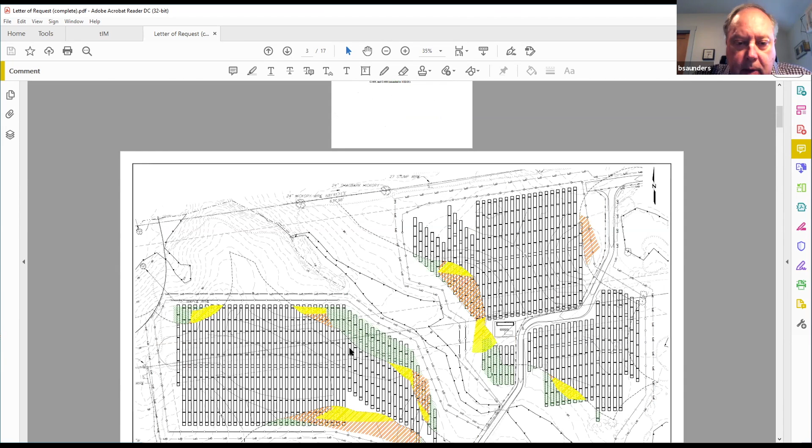And in the original plan, under the existing order of conditions, there was no situation where we had only panels—we had panels in the areas where we were doing grading. So the table I included in the cover letter shows that we have no solar panels only under the original plan. But there were, in fact, solar panels—they were just in the areas where we were also doing some grading. We didn't want to double dip on the numbers there.

Couple other things with the change in the solar panel system from fixed to tracking: we'll be able to increase the power output from this facility to 5 megawatts from 4. So again, it's the greater efficiency in a tracking system versus a fixed system.

I've already mentioned that we're staying the 25 feet back. There's no change in the driveway crossings. The equipment pads are located outside of the 100-foot zone as they were before. So the changes are grading and panels within the 100-foot buffer. And I'm happy to answer any questions to the best of my ability.

One thing I just wanted to add that we had talked about, Brad, was also that in the project narrative of the original order of conditions, it references a 50-foot setback, but you were able to provide information from a letter with DEP that remarked upon how it was supposed to be a 25-foot setback. And then I was able to find the minutes reflected that in the discussion as well. I don't know if you can still include that in this request—yeah, just another thing, I would like to include that in the request. There are a couple of inaccuracies in the existing order of conditions.

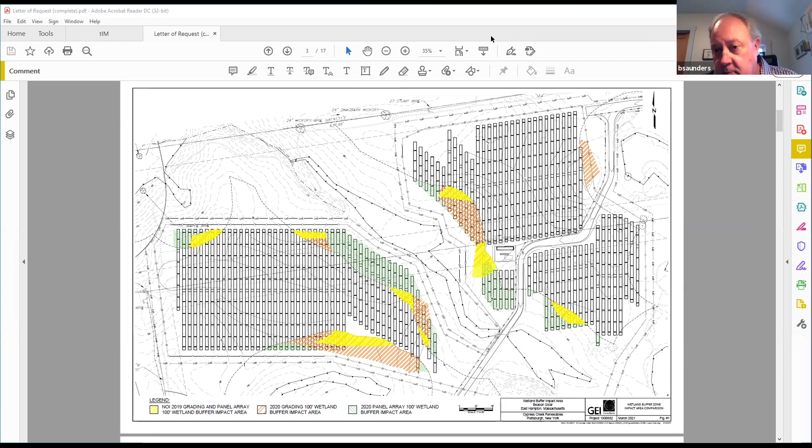Well, I haven't broken it down that way. What I did is looked at the change. So for instance, there's driveway within the buffer, and that hasn't changed - the same numbers that were provided in 2019 remain. There's work like the panels themselves, which there is a change, and that's why I provided that information. There's a change in grading.

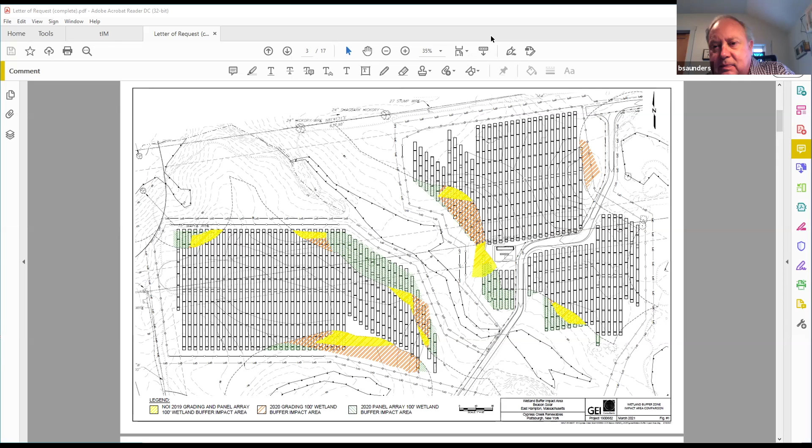And so I guess it's a question of adding them up in total, but the change should be essentially what I'm showing in this cover letter. So the overall change in disturbance - again, we did it back in 2019. We did the disturbance by particular, the numbers per different type of disturbance. So it's not like there's a simple overall number.

But the increase - there's 28.8 acres of 100-foot buffer zone on the site. The increase in work in buffer zone alone is roughly 26,770 square feet.

I think you said there was about 15 in the original order and 41,770 in this redesign. No, no, I misunderstand - yeah, I understand the confusion. There's a difference in grading. So if we break down an activity to grading versus solar panels, because we're doing a number of solar panels, but there's no grading required - it can be placed at the existing grades out there. So the change in grading within the 100-foot zone would be 41,770 minus 14,837. So about 26,000? Right, but that's just grading.

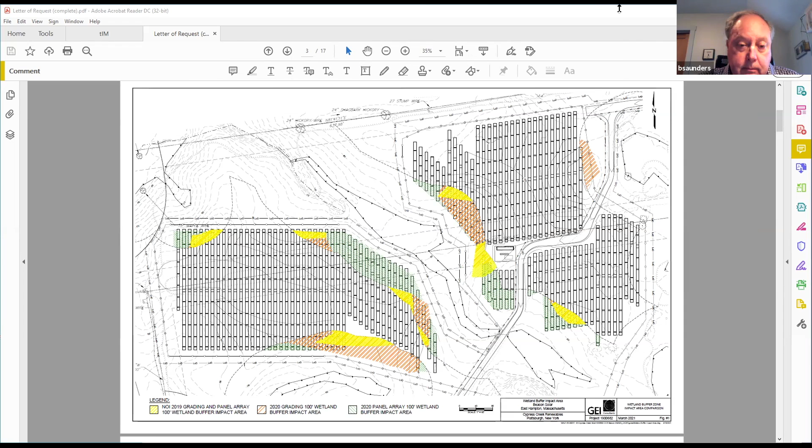My sense is that these are more than minor changes. Yeah, policy 85-4 really says it's for correcting errors like wrong file numbers or typographical errors, things like that, not really for changing the scope of the project. So I agree - the way this is phrased, relatively minor and unchanged or less impact on the interests of the act - I don't think I can look at something that's increasing its impacts, just grading alone by more than half an acre in buffer zone, and think that that's less impact.

So, short of that, are there other members of the commission who wish to speak? I don't want to shortchange anyone. Cassie, has Michael Whittemore joined the commission meeting yet? Actually, he's just joining right now. Fantastic.

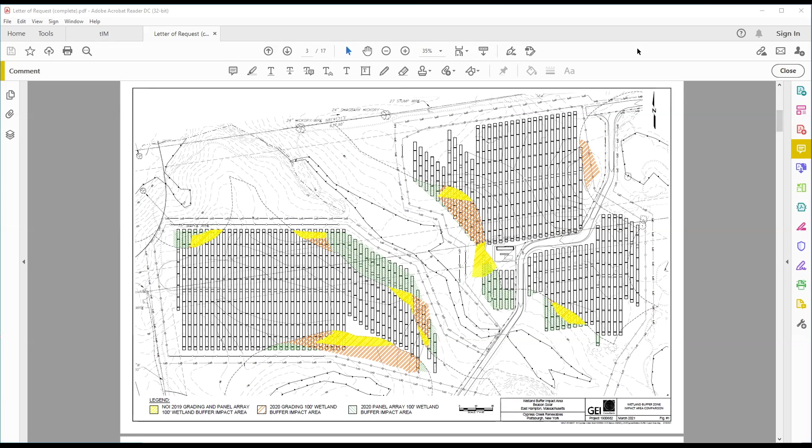Okay, well, thank you - I think you've gotten the kind of collective opinion relative to that matter. We appreciate your time and the graphic display of these changes - that's actually very helpful, thank you. Okay, thank you very much. Thank you, good evening, bye.

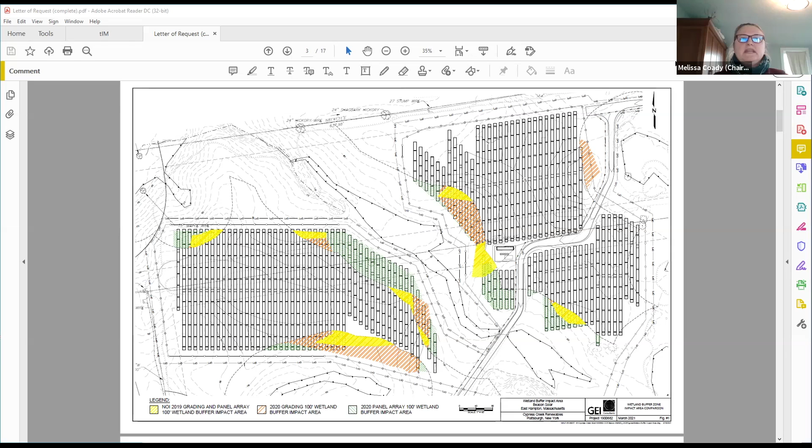All right, resuming agenda order. We have no public hearings or meetings and no requests for certificates of compliance. Deborah, I'm assuming you're back in the mix?

Yes, thank you. Okay, enforcement actions. Cassie, any updates to highlight?

Yeah, I did have one. I reached out to Mr. Judd at 11 Button Road, because that was something we wanted to do as springtime came around, which it seems to be finally here. So I reached out to him, and he actually said he was just about to reach out to me.

Because he had spent last week - I can read you his message. Last week, I spent some time filling in the holes with the dirt piled next to them and restoring the area to the previous grading. I then spread mulch that was from chopped up branches over the area. I took another picture yesterday to show some vegetation is already starting to grow in the area. I'm not working back in my office, but you're welcome to go visit the area to confirm.

The real steep part of the hill, I couldn't put any mulch on, but I figured that is basically the way it was before, if you look at the other side of the creek. He has higher resolution pictures available, and he talks about difficulty including the images. Those images are also provided in that update document I sent everybody.

My plan was to do a site visit as soon as I could to see the state of things out there. I think where the conversation left off last time was that the commission wasn't sure what the state of the plants were in that area beforehand, if there was significant vegetation or not. So we weren't sure what kind of replanting to require, if any. I don't know if it's too early in the season to make that determination, but I'd be willing to go out there and look.

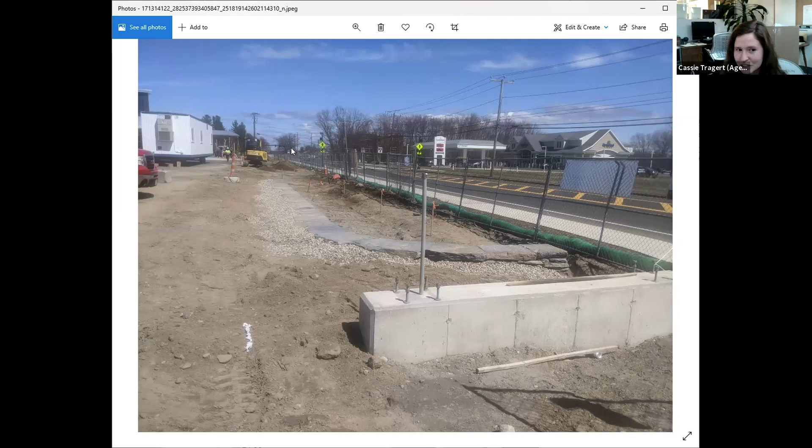And there's the wetland areas over there. You kind of see the trees. Yeah, I mean, that's on the completely opposite side of the road.

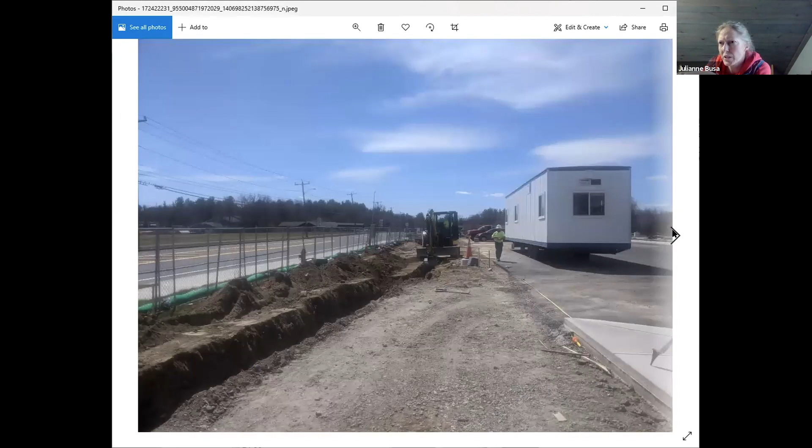So unless - the only question, which I can't tell from the pictures, is there potential for the soil to get rinsed across the sidewalk and into a catch basin on the close side of the road that then would dump over there?

Yeah, that's a good question. I'd have to look. I can go out again and look for that, because honestly I didn't check to see if there's any associated with the road catch basins. So I can check for that.

When that trench gets filled back in, it might be pretty level and stable, so. Yeah, that's kind of what they were thinking, that it might take care of it. Yeah, like I said, this will be filled, and then they'll do seeding, and then they would remove the wattle. It's a closer picture.

Oh, it's not a good one. No. Yep, trench. Oh, I guess that's it. So yeah, I guess this area is kind of where it's ending.

That's where, over here, like across the street, is where the resource area is, and then it kind of extends over here. So it's kind of a downslope from that area to this area.

So Cassie, what day did you say you took these photos? These are on the 7th of April.

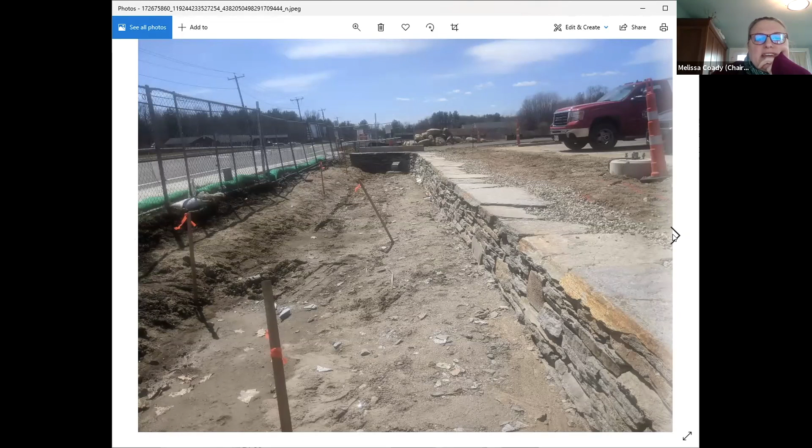Okay, and how long did it, I'm just trying to see when it last rained relative to that date, because that one unfinished stormwater basin - this is part of it. This is the other, that inlet was over here.

Get back to that picture. So you said this was the 7th or the 4th? The 7th. Here's the entirety of that basin.

I'm just a little concerned that it has so much standing water in it, because this isn't an official site by any stretch of the imagination. I could go to something slightly more official, but it was almost a full week ahead before that we had may have had any recorded precipitation.

So none on the 6th, none on the 5th, none on the 4th, trace on the 3rd, less than 1/10 of an inch on the 2nd, and about 2/10 of an inch on the 1st.

So I'm just in general being sensitive to stormwater systems being constructed as designed so that they can function as designed. I'm curious as to why that has - if you could check and see if that is supposed to, or get clarification on the status of this basin, and if it was supposed to infiltrate, because that seems like that shouldn't be holding water after almost a week.

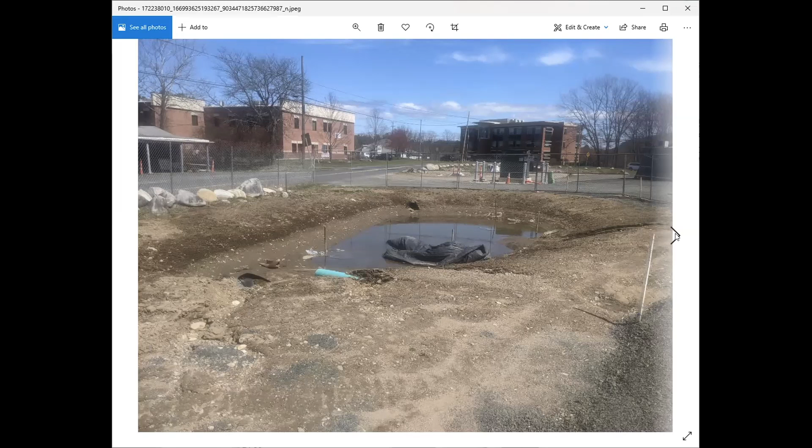All right. I mean, yeah, as long as it's pretty flat, and it seems like the grass will grow in quickly before any of that soil would move someplace. Right, it seems to be all right.

Cassie, I'm assuming they're going to hydroseed. Can you verify? I can verify that. Okay.

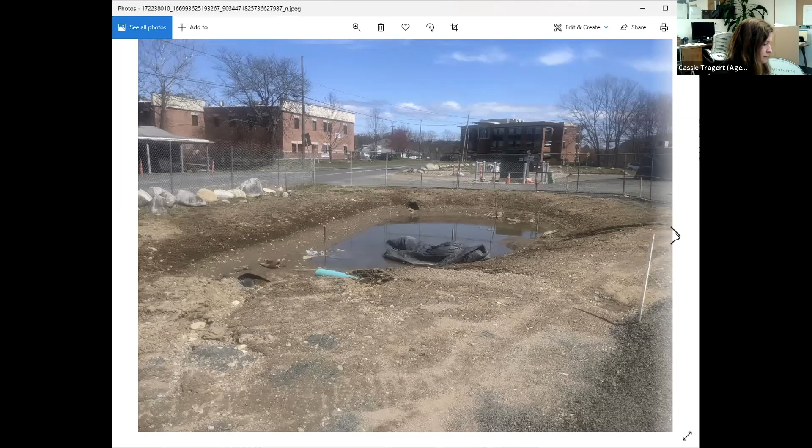I noticed a line of boulders in a field to the south the other day. I guess I'm thinking those are monuments delineating the wetland boundary that we asked for, but it's been a while so I didn't quite remember.

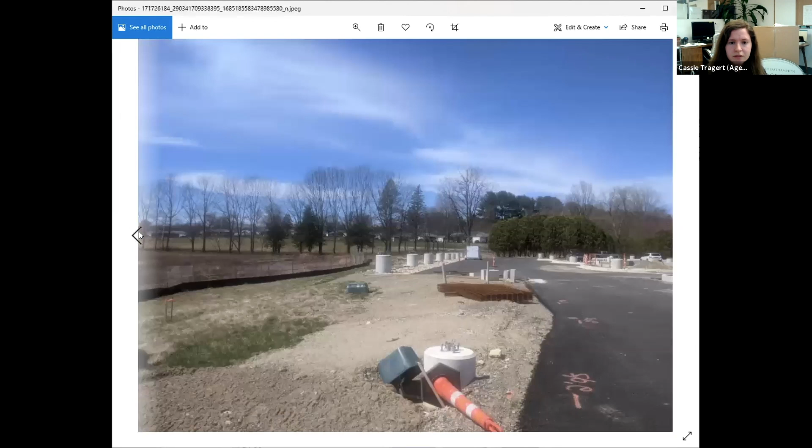I'm pretty sure that was a condition, but what they've also done, you can see it in one of these pictures. They put up these markers that say wetland boundary. So I don't know if that's the area you're talking about where you're seeing the boulders. Yes, okay, so they might have done that in addition.

I saw them the other day as well, and that's what it looks like. They're all out along, or parallel to, Route 10 along that border of the wetland.

I can go through just generally to give you guys an update from the site visit on everything else. So, this is the area we've already covered, you've seen the pictures of this basin. The basin that is holding water is behind me right now. There it is in detail, just this very blurry picture of this box.

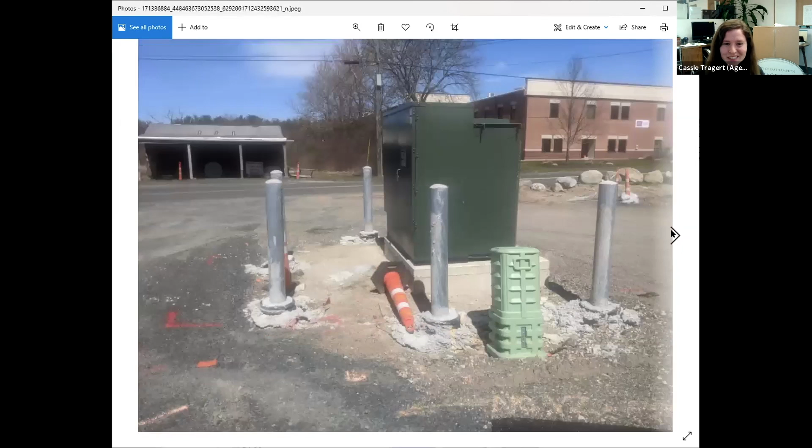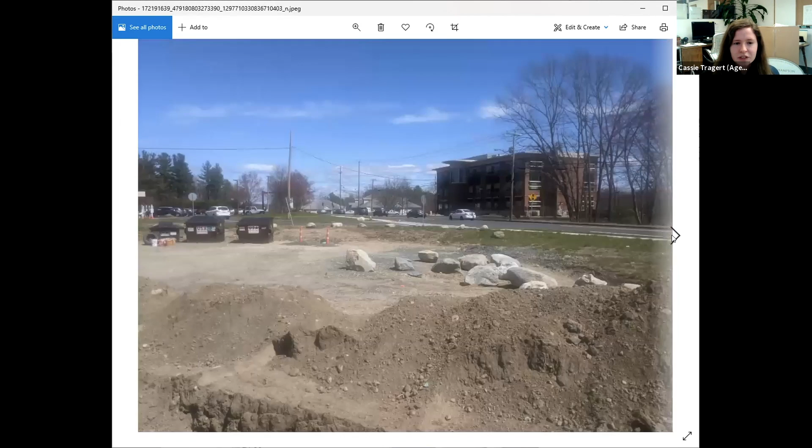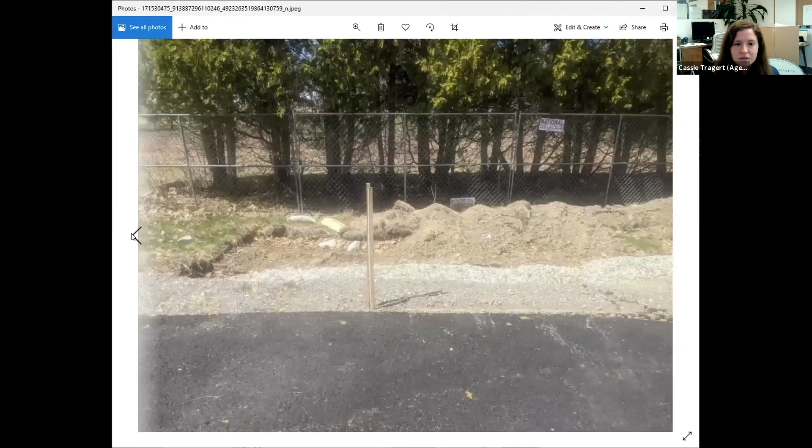So jumbled, sorry. Yeah, there we go. So this is all along it. That basin that was holding water is over here, and Route 10 is way over on the other side of the property.

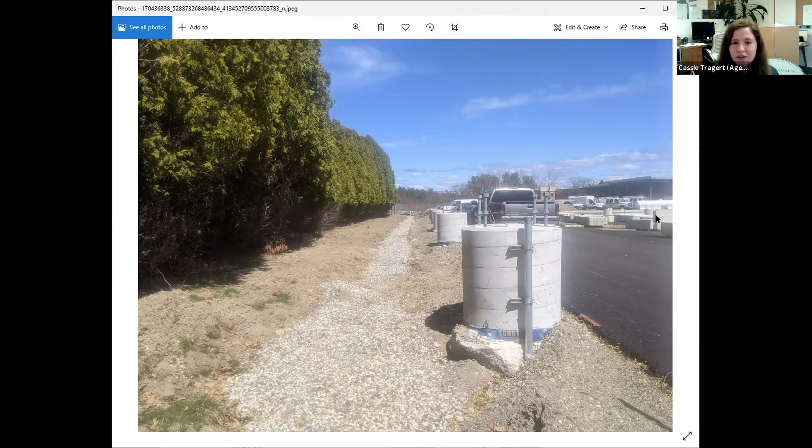That all looked good, it made sense. This is the rear, so the wetlands to the south are just to the left here. These outlets, the drainage along the top, this is the existing outlet that was there. Erosion controls, everything's looking good.

This is a stockpile of rocks, some nice looking rocks there. Wonder where they're getting those from. They probably dug them up, maybe. If it sounds like they're looking to get rid of them, let me know. Okay, I will. They didn't say that though.

This is a marker that's in between where the wetland is and the parking lot. The parking lot is over, I think, either to my left in this. They're going to put up these purple martin boxes in those locations, I should have a picture of it. It's like over here-ish is where they had marked that ground.

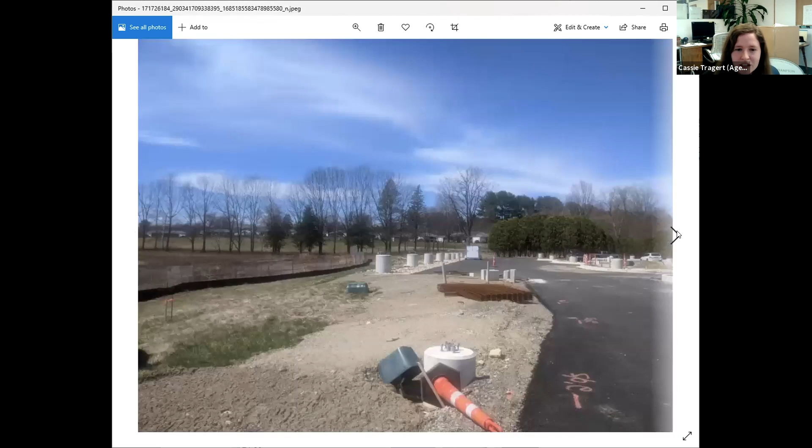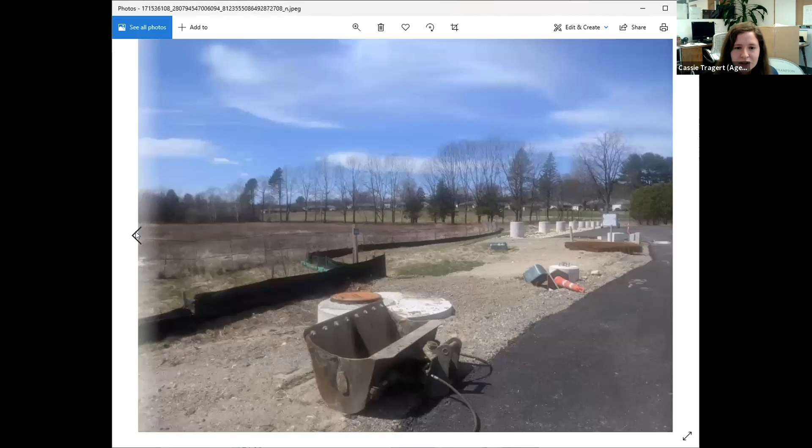This is a nightmare, sorry, I don't know why it's so out of order when I took them. These logs, that's what they're going to be mounted on, is these logs.

Okay, but overall, more of this area, that existing basin, also holding water. Again, unless they were discharging dewatering effluent through the system, I don't understand why there's so much standing water on site.

It doesn't seem to be - I mean, Dan Buttrick, correct me if I'm mistaken, but I thought infiltration was supposed to occur within 48 hours. Am I making stuff up?

That's about right, but during the construction period things may not quite be operating properly. So there's that fine layer of silt in that basin we were looking at earlier, which will probably be scraped out when they convert it from a construction phase to a post-construction stormwater measure. But who knows, I can't explain why there'd be so much water in this level spreader thing.

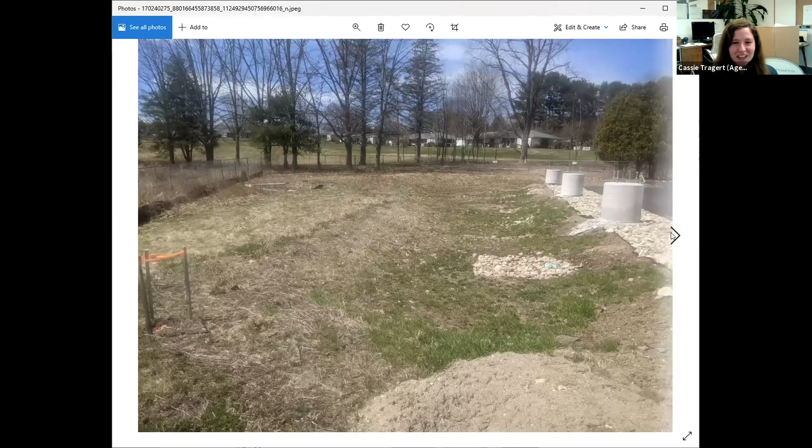It's a perfect preamble for our next item. I don't know if anybody has any other questions about this site at this time. I can go on to the next one. Okay, please.

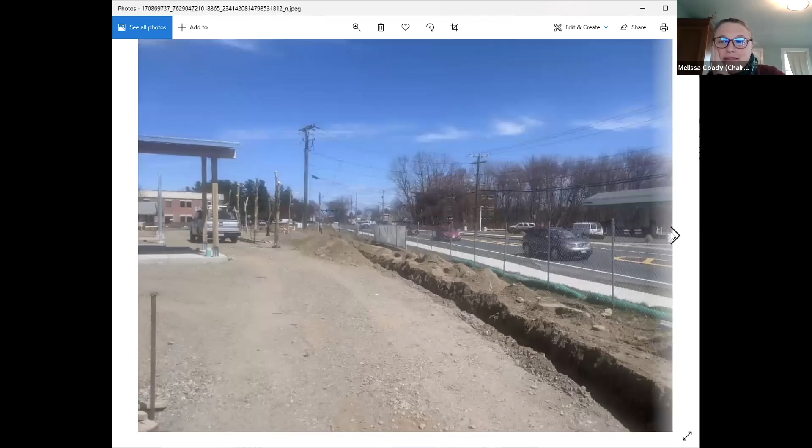Item M. Cassie, Easthampton School Committee, number 151305.

So two things for this one. Again, I did a general site visit just because it's springtime and checked everything. But also the city received a complaint from a resident about some of the stormwater structures. They put in some silt fencing around them to try to keep them from getting overrun with the loose construction sediment, and that had been failing in some places. By the time we did the site visit, they had fixed that and cleared that area as best their ability and reestablished that silt fencing. So I'm going to check that as well.

This is going to have a million pictures, but hopefully I can do this in a reasonable way. So let's see. This site visit was conducted on the 8th of April.

And the other thing that I found, and Jay also was able to attend, which was great, was that one of the stormwater structures in the rear of the building has been retaining water for some time and not draining. They said it didn't drain, wasn't empty like all summer.

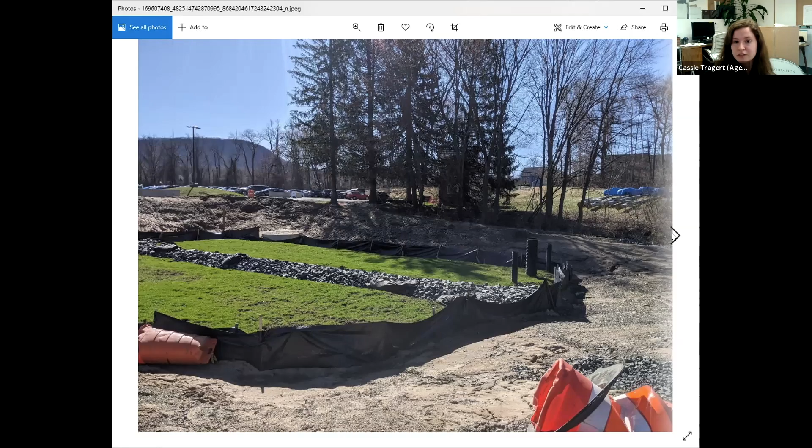Sorry, so I know you were not with the commission when it reviewed this project. Would it be possible for you to look at the file, like the stormwater report, particularly the on-site soils evaluation, and see what they logged for that general vicinity? Because if what the contractor is running into is significantly different from what was documented and designed around, that's a problem.

Especially on a site historically or anecdotally known for its water issues. Right, yeah, I think the way it was described to me, the site has the best of both worlds - it's very sandy in some spots and very clayey in others. That's how it's been described.

So that was the main thing that stood out to me from this visit. Otherwise, everything looked good in terms of erosion controls. They had fixed - this was the area where that problem had occurred, and you can see the old silt fencing. I guess they just left it, and they put new silt fencing in, and cleaned out the sediment that had made it in there.

They left this area. They've seeded other areas, and you'll see that in some of the other pictures. That's what's underneath this black top, I think, or they're getting to that stage, but they left this because they're going to do another connection that isn't done yet.

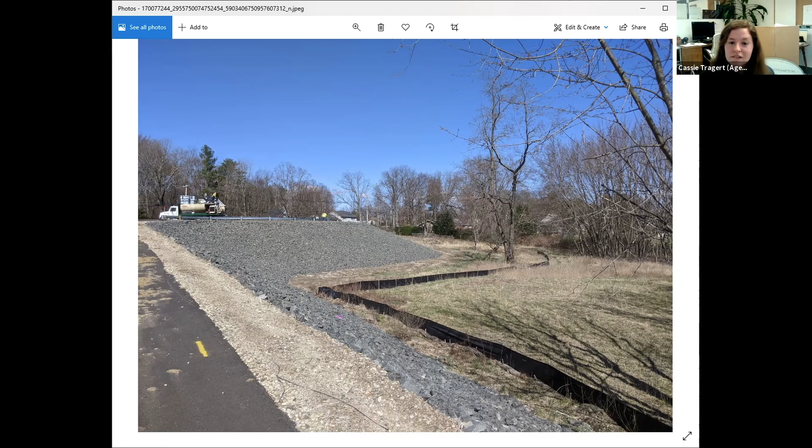Okay, I'll let you know about that one at the next meeting. This is the one that had the breach that a resident made a complaint about again.

So this is to the north of the property. The basin that's holding water at the rear is up ahead and to the right slightly. But basically there's wetlands all along this edge here.

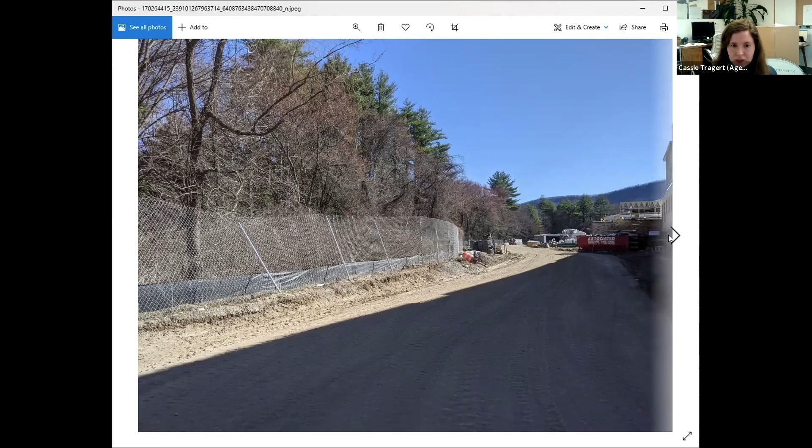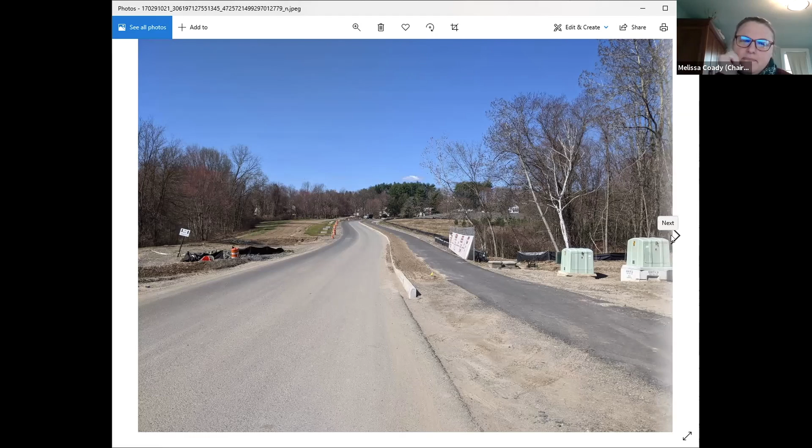Now we're back at the front of the school again, looking up towards everything. There's another basin over here, and then there's that outlet towards the brook down here. Did you get a look down at the stream? I did, yep. And how is it looking?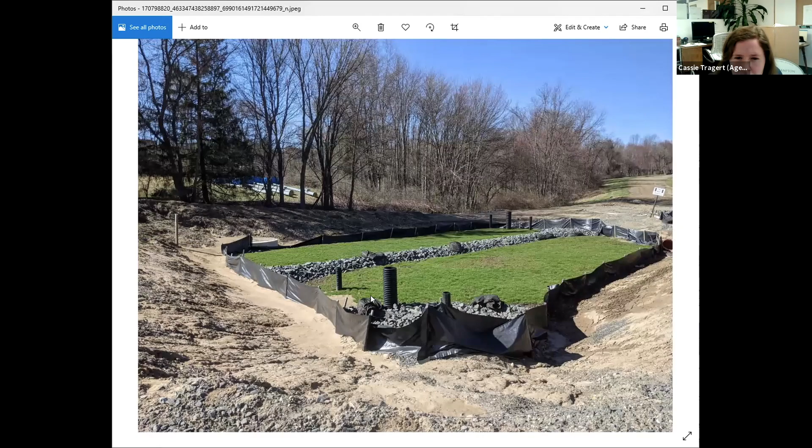Zoom ahead. That was not it. Okay, this is the, nope, not that one. That's across from the stream. Okay, so this is above. There's the riprap and there's an outlet here, and then that's the stream down below.

Do you have a shot from the stream looking up or from the other side of the stream? Let's see here. Oh, nope, this is a little bit farther back from that other image that showed the riprap. Can you go back another one or two? That one. Yep, so yeah.

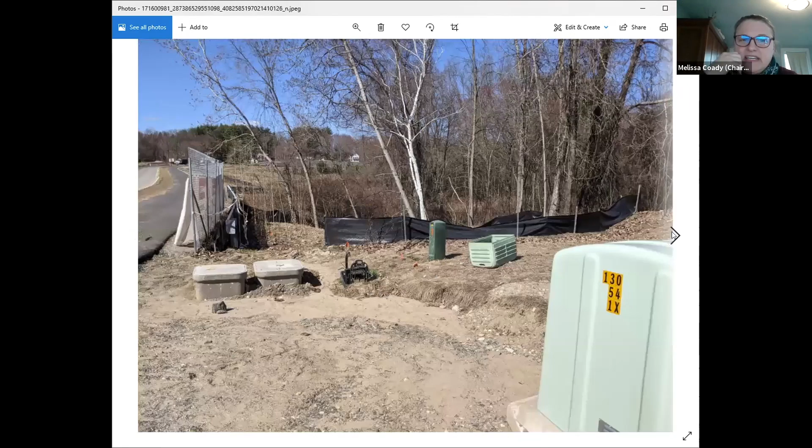That failed. Is that in a stormwater basin? Yeah, but they still have sediment getting to the other side of the silt fence. How is that happening, is it going under it? I guess that'd be my guess. So they need to clean that out, or it's a spot that needs to be cleaned out before it vegetates. Yeah, it looks like it went under it. I'm guessing that's not the type of soil they're supposed to have in there, even if it vegetates.

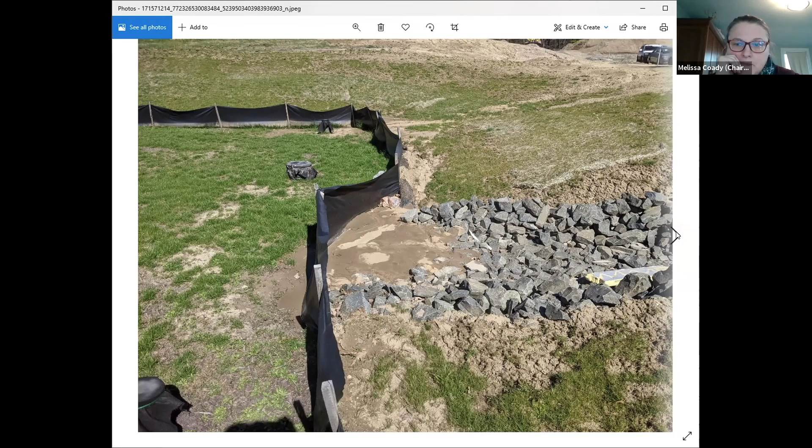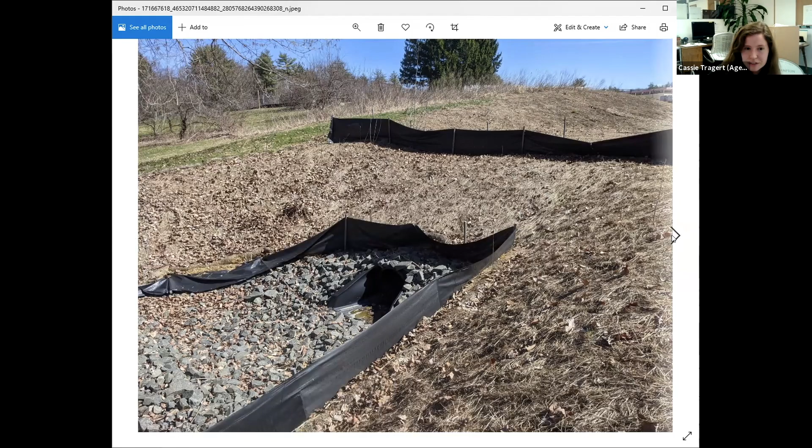Okay, let's see. Yes, this is looking up from the stream, and I think hopefully I have a better picture, more from the inside of the stream.

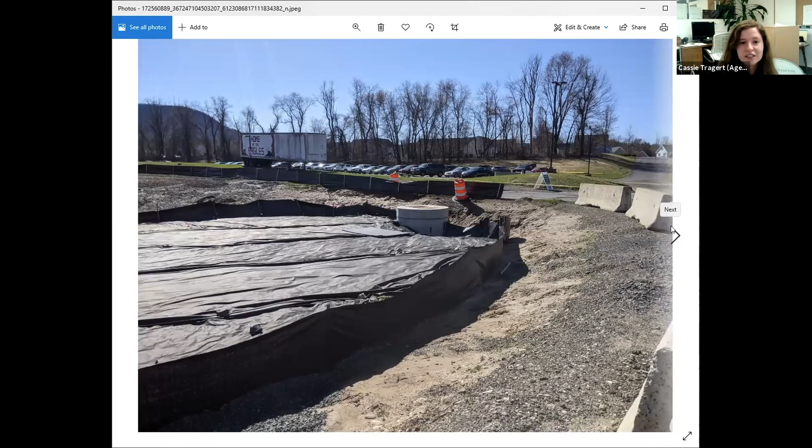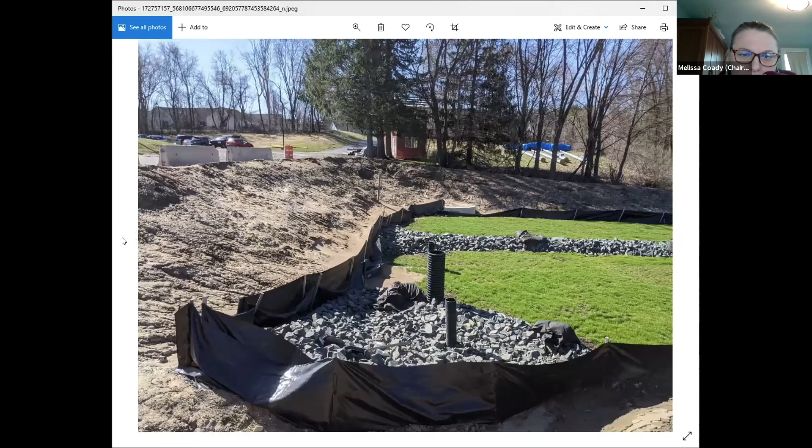Well, I didn't see any sediment accumulation on the riprap below the outlet, so that's encouraging. Yep, and I can say confidently here's another, although there's trash. But I didn't find any sediment like... go back to this one? One more. Yeah, at the tail end of the riprap, it did look like there was.

I might have, let me see if I have one more picture. Then hopefully it will be good. Oh, I guess not, that's the end of it.

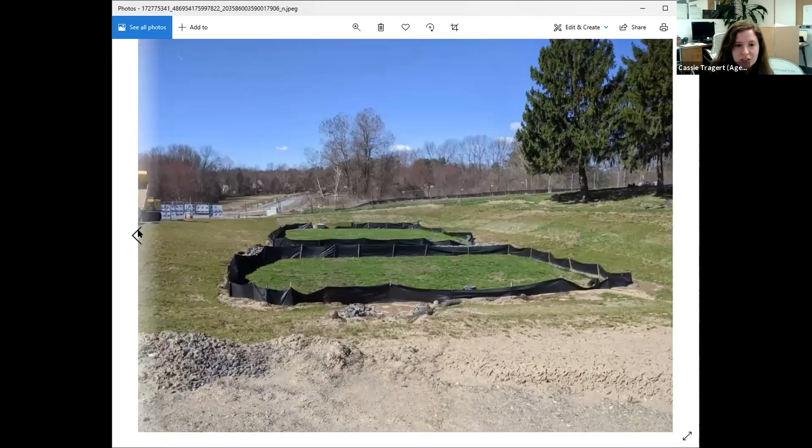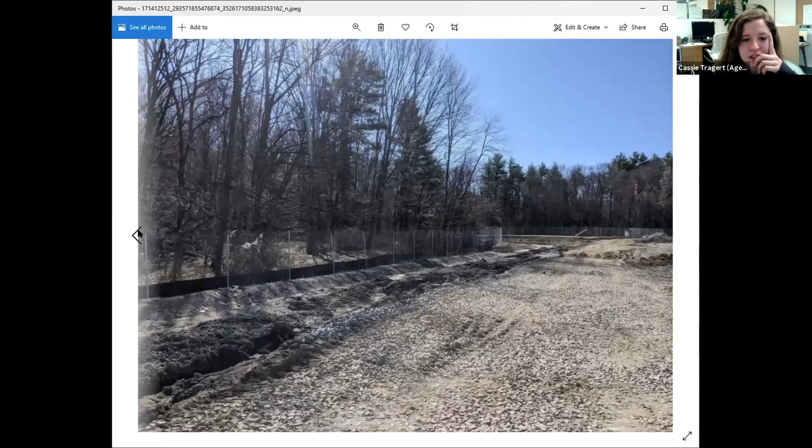Okay, so there are definitely some areas of sedimentation that need to be addressed. That needs to get cleaned up before it gets washed into the stream. Yeah, definitely. And then things with the sediment in the stormwater structures, they're supposed to clean those out before the project's complete. And if they need to clean them out more frequently because it's washing sediment into the rest of the system, then that's what they have to do. Right.

So they still have a silt fence down at the bottom as well. I don't see any signs of erosion from the adjacent uplands here. It's the end of that.

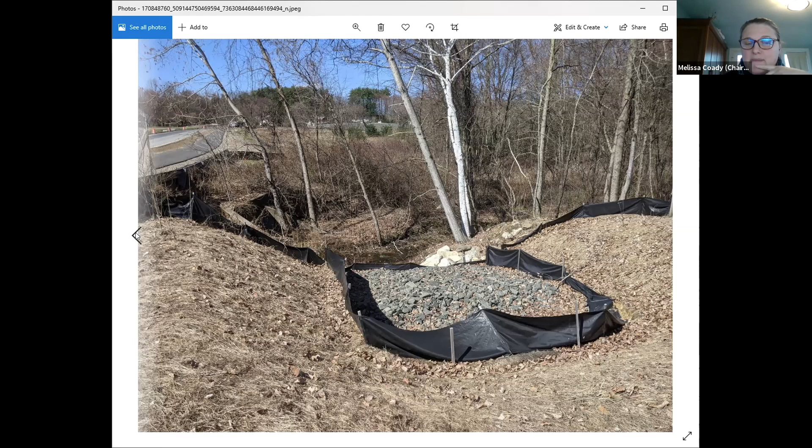The concern is if there's deposition, there's material moving through the pipes and depositing in that velocity dissipation pad riprap area, that's eventually going to get washed into the stream. And the goal is that they will be able to keep the riprap there to slow water down, not trap sediment. Gotcha.

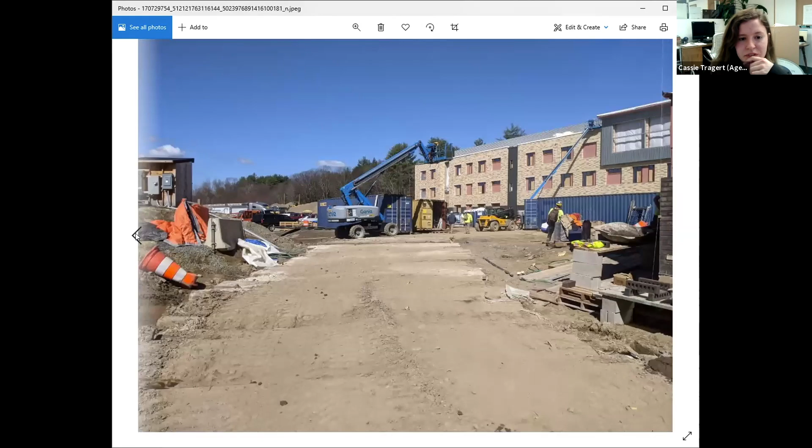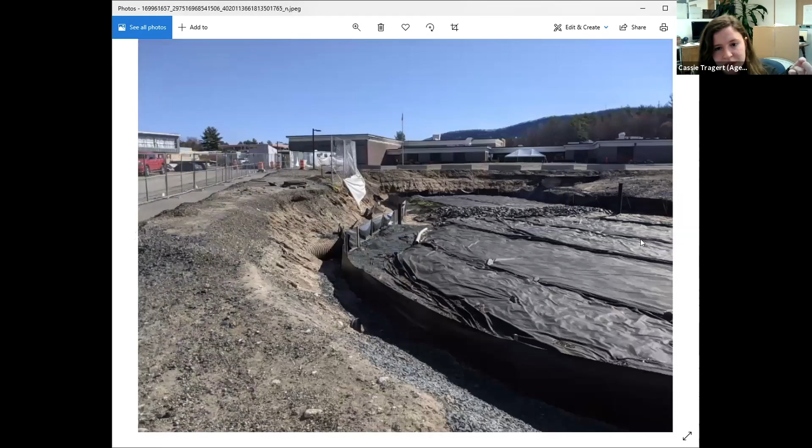All right, so just the interior of the site. Let's see, that didn't look good either. I'm just trying to get to that basin. So yeah, it's holding water, and it's definitely something they're thinking about. A significant change is going to be needed because it's been holding water all year, I think they said.

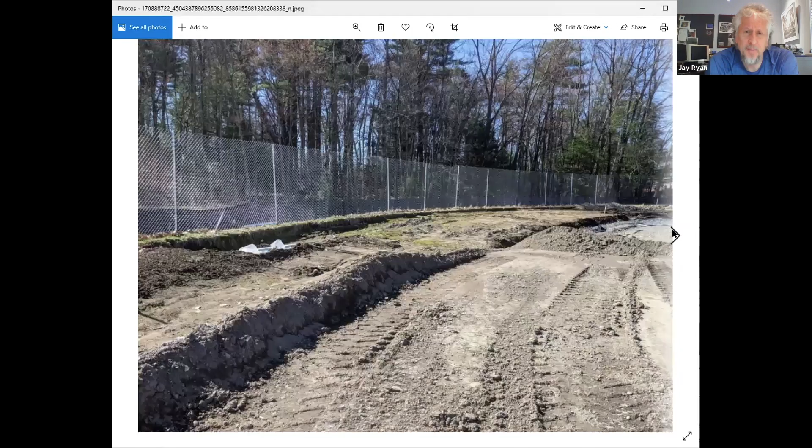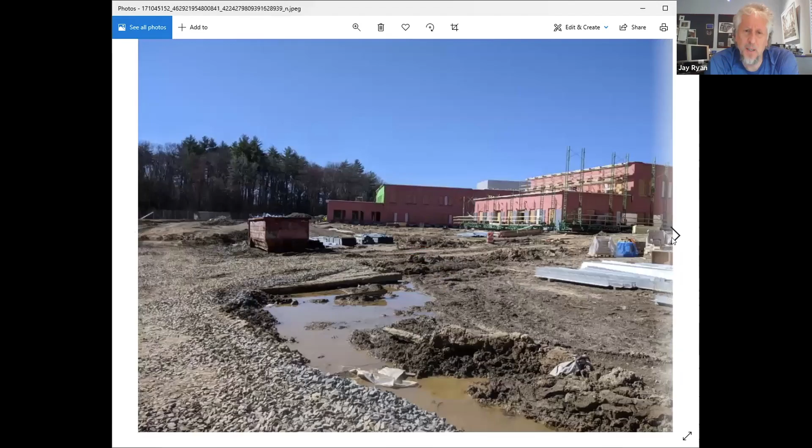Oh yeah, and then it has this strange, I don't know what that is. It looked like a cave in, but I don't think water's getting out of the area. I think it just caved in. Is it just saturating and slumping? Yes, I guess so. We didn't get close to it because it didn't look that safe to walk on.

So, Cassie, I think it's reasonable to tell the engineer and the contractor that the commission's going to expect to hear their recommended corrective actions before they're implemented, because it doesn't seem that the system is going to function as it was presented to us.

And yeah, parts of it are actively failing, deteriorating.

So you're talking about for all the stormwater structures, we need to know what those corrective actions are going to be, if they need to come up with something. Are you talking about specifically just for this basin that's retaining water, and the other ones? Pretty much anyone that's holding water, anyone that's got accumulated sediment, just hearing that they have a plan to clean things out before finalizing the system and handing it off to the city.

Yeah, definitely, that was discussed at the site visit. They're trying to keep on top of it, is what they said, and they've actively been checking them when they do the monitoring reports and things like that. They're looking for things like that and trying to clean them periodically while the site is so unstable generally. But I can see maybe trying to get something in writing, it sounds like you'd like.